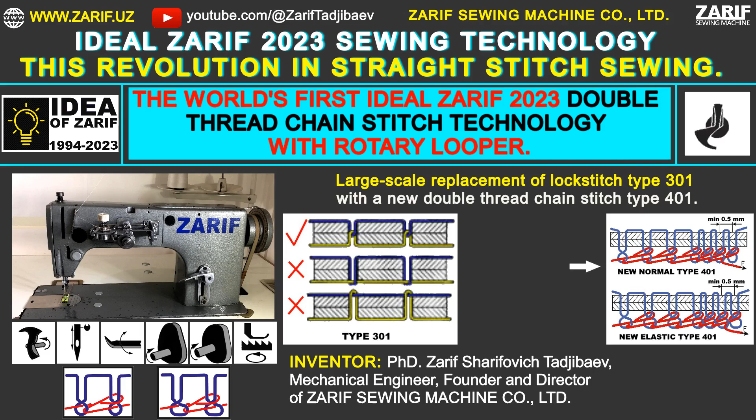1997. We modified an industrial lockstitch sewing machine, Class 1022, Orsha, Belarus, to carry out our initial trials. Through extensive testing, we identified areas for improvement and gradually improved the machine by applying our expertise. Finally, in 2023, we successfully created the world's first Ideal Zarif technology for straight stitch sewing.

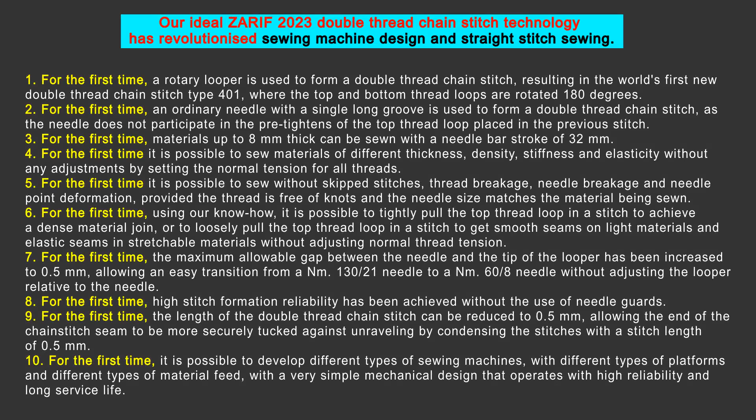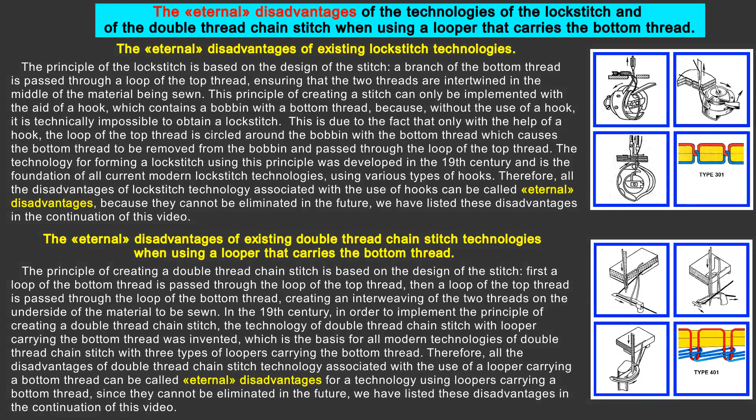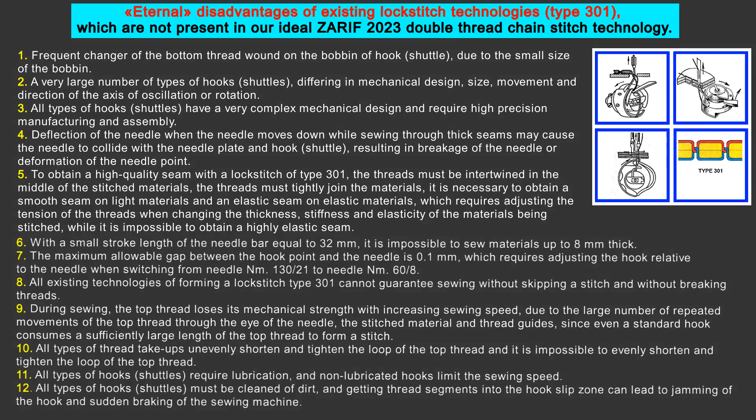Our Ideal Zarif 2023-year double thread chain stitch technology has revolutionized sewing machine design and straight stitch sewing. The eternal disadvantages of the existing technologies of the lockstitch and of the double thread chain stitch when using a looper that carries the bottom thread. Eternal disadvantages of existing lockstitch technologies, type 301, which are not present in our Ideal Zarif 2023-year double thread chain stitch technology. Eternal disadvantages of existing double thread chain stitch technologies, type 401, which are not present in our Ideal Zarif 2023-year double thread chain stitch technology.

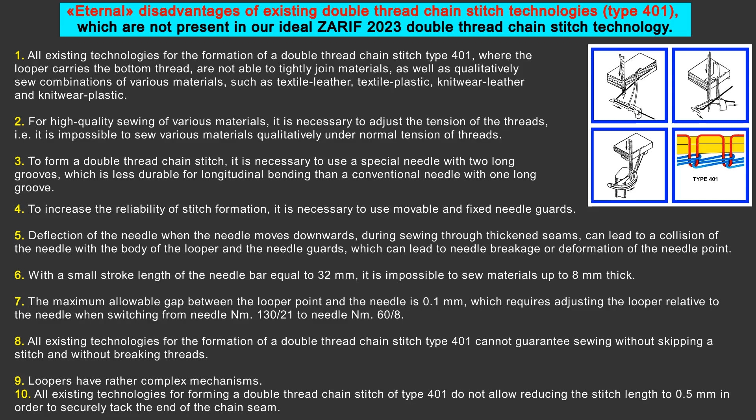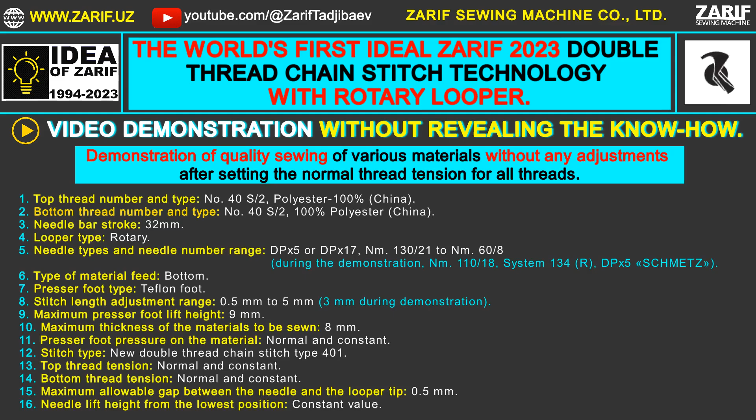Video demonstration without revealing the know-how. Demonstration of quality sewing of various materials without any adjustments after setting the normal thread tension for all threads. Our prototype of the innovative Zarif double thread chain stitch sewing machine works on the basis of our Ideal Zarif 2023-year double thread chain stitch technology with a rotary looper.

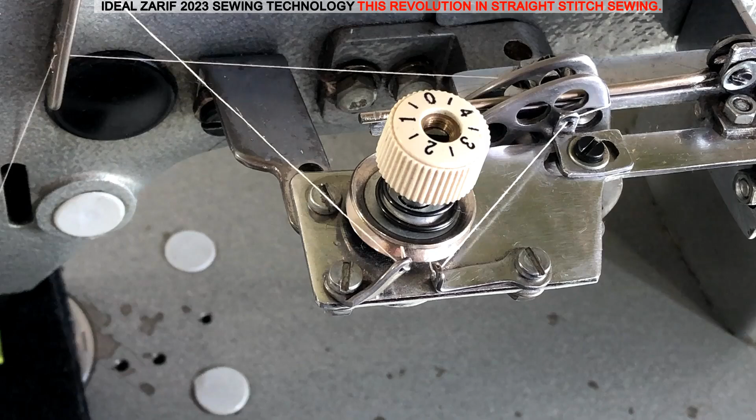For the sewing demonstration, we will be using sewing threads made in China. The main requirement is the absence of knots, as knots disrupt the stitch formation process as they cannot pass through the eye of the needle. During sewing, the top thread tensioner nut and the bottom thread tensioner nut, not shown, remain in a fixed position, ensuring the normal thread tension, neither too loose nor too tight.

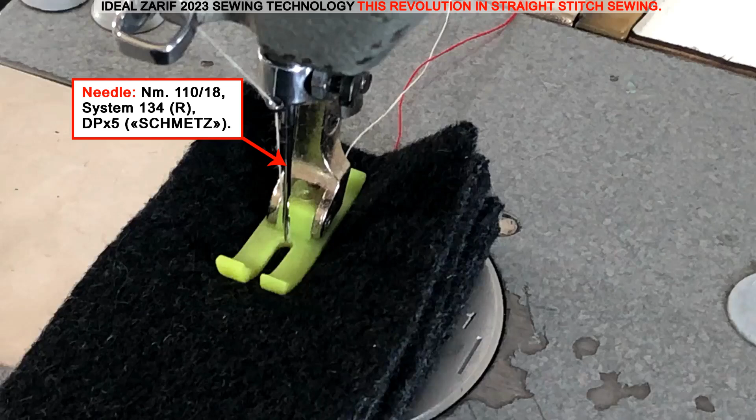In our Ideal Zarif 2023-year double thread chain stitch technology, the needle is not involved in pre-tightening the top thread loop from the previous stitch. As a result, for the first time ever, a double thread chain stitch sewing machine uses a needle with one long groove. This design offers greater resistance to bending compared to the double groove needle used in existing double thread and multi-thread chain stitch technologies.

Thanks to our Ideal Zarif 2023-year sewing technology, it has become possible for the first time in the world to reduce the length of the double thread chain stitch to 0.5 mm. This allows for a more secure tacking of the chain stitch seam end and prevents unraveling due to condensed stitches at a stitch length of 0.5 mm.

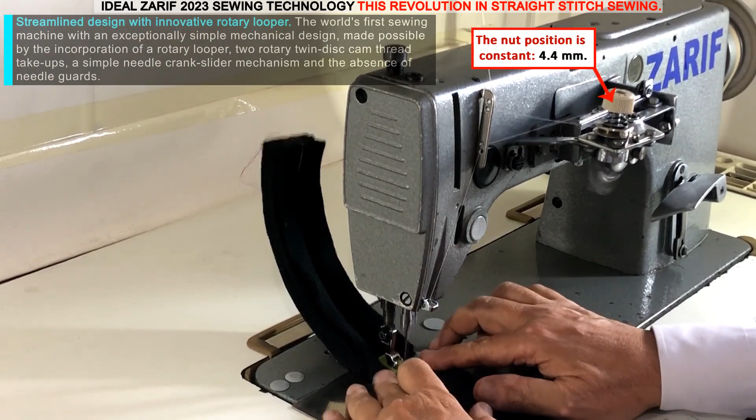Streamlined design with innovative rotary looper. The world's first sewing machine with an exceptionally simple mechanical design, made possible by the incorporation of a rotary looper, 2 rotary twin-disc cam thread take-ups, a simple needle crank slider mechanism and the absence of needle guards.

Revolutionary chain stitch look. This pioneering double-thread chain stitch sewing machine produces a new double-thread chain stitch type 401 in which the loops of the top and bottom threads are rotated 180 degrees. This innovative design makes the underside of the chain stitch look like a thick thread running along the seam, rather than a chain of threads, due to the use of a rotary looper.

1 long groove needle for maximum strength. For the first time, a double thread chain stitch sewing machine uses a needle with 1 long groove to produce a double thread chain stitch type 401, which offers greater flexural strength than a needle with 2 long grooves used in existing double thread and multi-thread chain stitch technologies.

Advanced capabilities for sewing thick materials. This groundbreaking sewing machine can sew materials up to 8 mm thick with a short needle bar stroke of 32 mm, thanks to our know-how. Adaptation to different materials. The world's first sewing machine that can efficiently sew a wide variety of materials with different thicknesses, densities, stiffness and elasticity without any adjustments, as long as all threads are set to normal tension, thanks to our know-how.

No needle adjustment for different materials. The first machine in the world that can sew different materials up to 8 mm thick without having to adjust the height of the needle lift from the lower position to form a loop with the top thread, thanks to our know-how. Easily sew combinations of different materials. The world's first double thread chain stitch sewing machine that can sew combinations of different materials such as textile-leather, textile-plastic and textile-plastic zippers without changing the normal tension of the threads, thanks to our know-how.

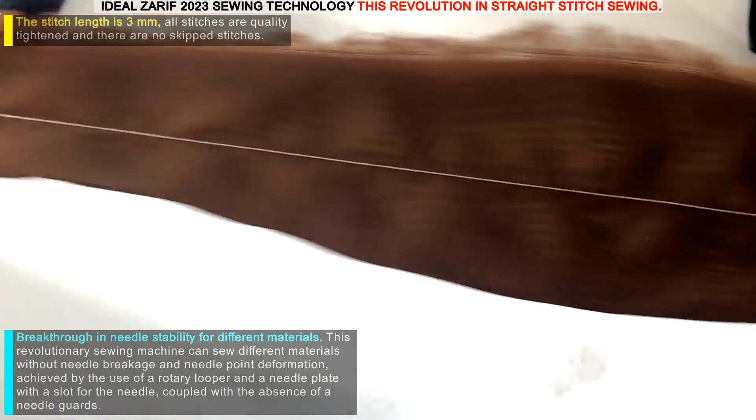Breakthrough in needle stability for different materials. This revolutionary sewing machine can sew different materials without needle breakage and needle point deformation, achieved by the use of a rotary looper and a needle plate with a slot for the needle, coupled with the absence of needle guards.

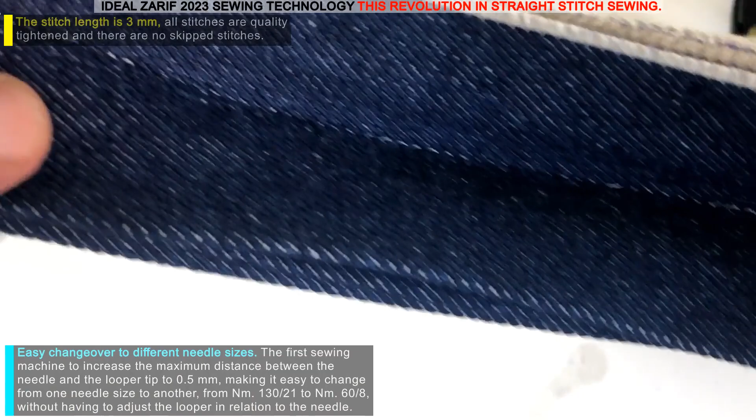Easy changeover to different needle sizes. The first sewing machine to increase the maximum distance between the needle and the looper tip to 0.5 mm, making it easy to change from one needle size to another, from number 130 to number 60, without having to adjust the looper in relation to the needle.

Elimination of skipped stitches and unraveling. This pioneering sewing machine, thanks to our innovative design, can sew materials without a single skipped stitch, which is critical for chain stitch seams, as all types of chain stitch seams are prone to unraveling, both at the end of the seam if not securely tacked, and from the skipped stitch back to the beginning of the seam. No thread breaks.

The first sewing machine capable of sewing through materials without thread breaks when low-strength threads and threads with knots are not used, thanks to the smooth tightening of the top and bottom threads with 2 rotary twin-disc cam thread take-ups and our know-how. Quality joining of different materials without adjustments. For the first time, our advanced technology allows to quality join materials of different thicknesses, densities, and stiffnesses with chain stitch without any adjustments during the sewing process, simply by setting the normal thread tension for all threads, thanks to our know-how.

Efficient sewing of mixed material combinations. Our advanced technology enables high-quality stitching of material combinations such as textile leather, textile plastic, and textile plastic zippers without the need to adjust the normal tension of the threads, thanks to the use of our know-how.

Secure tacking of the chain stitch seam end. The world's first double thread chain stitch sewing machine, thanks to our know-how, makes it possible to reduce the length of the chain stitch to 0.5 mm, thus making the end of the chain stitch seam more secure against unraveling by condensing the stitches with a stitch length of 0.5 mm.

For the first time, materials can be joined tightly with chain stitch. The world's first double thread chain stitch sewing machine, thanks to the application of our know-how, is able to lock the top thread loop tightly in the stitch without changing the normal thread tension, resulting in a normal stitch that ensures a tight joining of materials for the first time in the world.

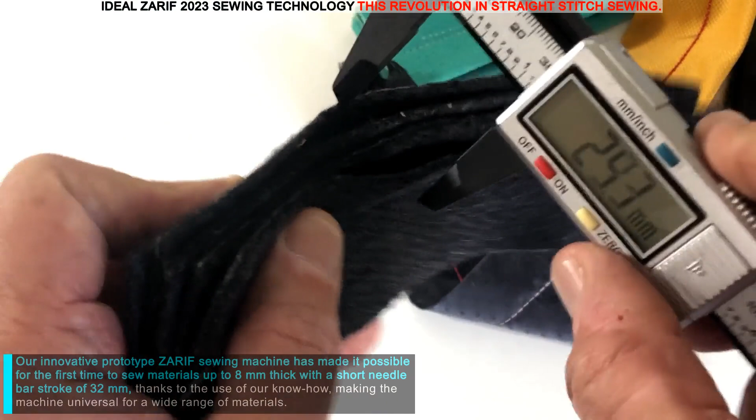Our innovative prototype Zarif sewing machine has made it possible for the first time to sew materials up to 8 mm thick with a short needle bar stroke of 32 mm, thanks to the use of our know-how, making the machine universal for a wide range of materials.

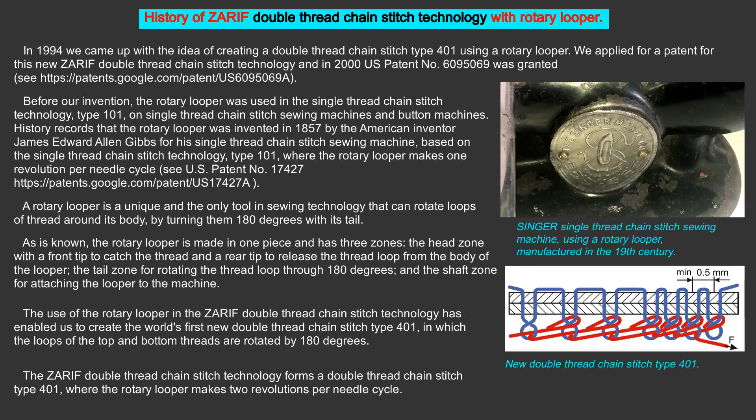History of Zarif double thread chain stitch technology with rotary looper. In 1994 we came up with the idea of creating a double thread chain stitch type 401 using a rotary looper. We applied for a patent for this new Zarif double thread chain stitch technology, and in 2000 US patent number 6095069 was granted. Before our invention, the rotary looper was used in the single thread chain stitch technology, type 101, on single thread chain stitch sewing machines and button machines.

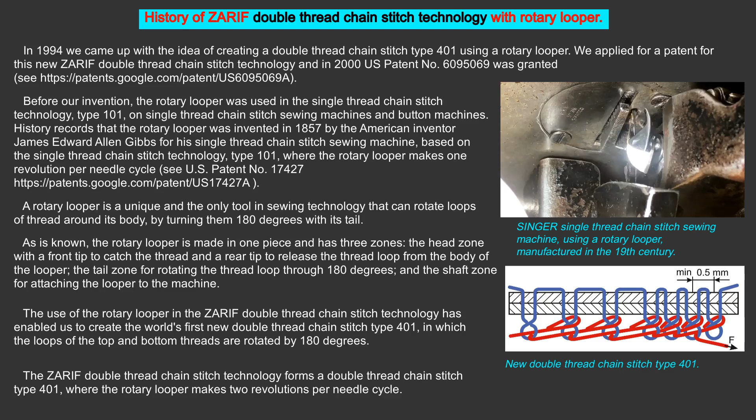History records that the rotary looper was invented in 1857 by the American inventor James Edward Allen Gibbs for his single thread chain stitch sewing machine, based on the single thread chain stitch technology, type 101, where the rotary looper makes 1 revolution per needle cycle. See US patent number 17427. A rotary looper is a unique and the only tool in sewing technology that can rotate loops of thread around its body by turning them 180 degrees with its tail.

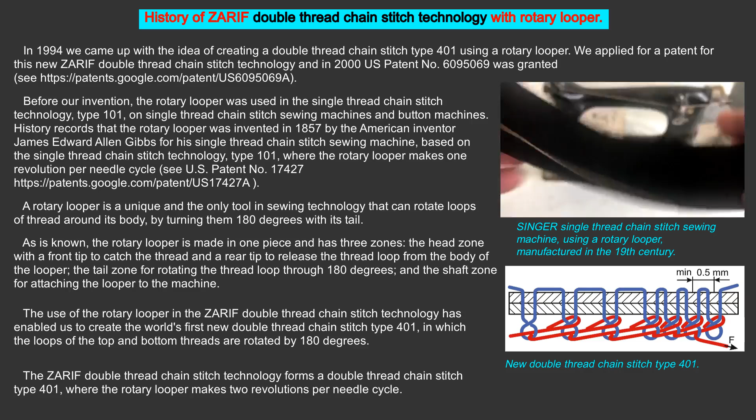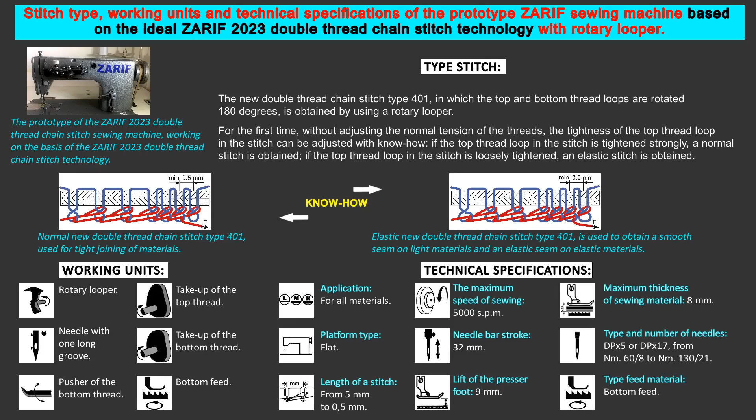Stitch type, working units, and technical specifications of the prototype Zarif sewing machine based on the ideal Zarif 2023 year double thread chain stitch technology with rotary looper. The world's first prototype of the Zarif 2023 year double thread chain stitch sewing machine has an extremely simple mechanical design and forms stitches with high reliability and durability.

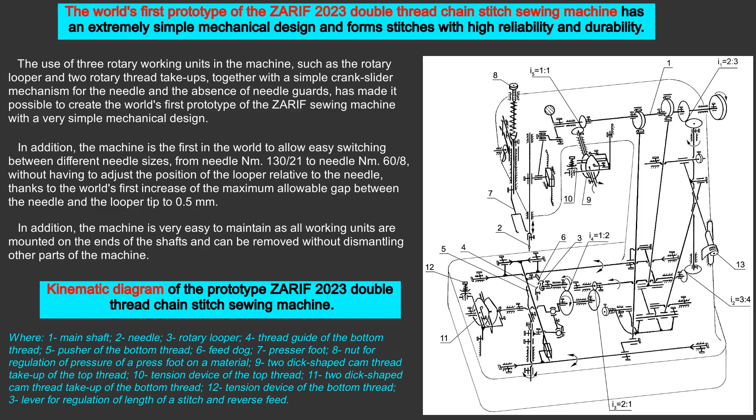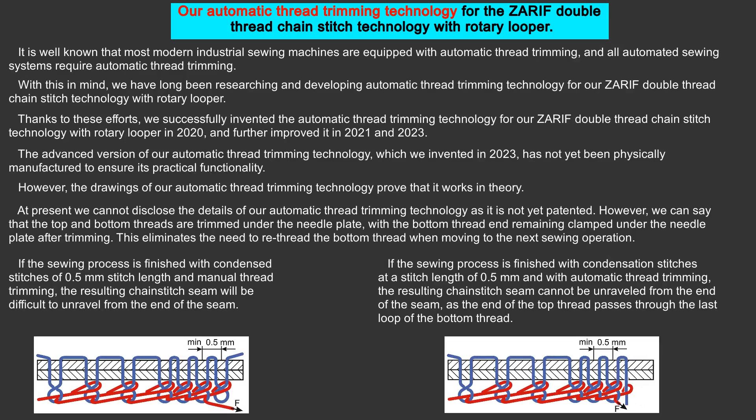Kinematic diagram of the prototype Zarif 2023 year double thread chain stitch sewing machine. Our automatic thread trimming technology for the Zarif double thread chain stitch technology with rotary looper. Our ideal Zarif 2023 year double thread chain stitch technology with rotary looper opens a new era in the development of automated straight stitch sewing.

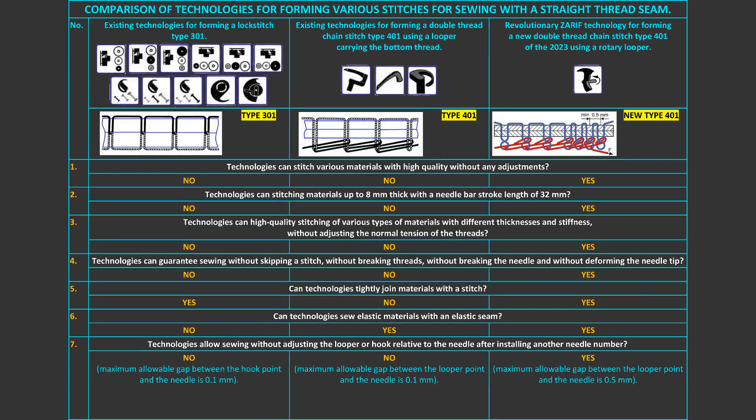Application of the revolutionary ideal Zarif 2023 year double thread chain stitch technology with a rotary looper that forms stitches in only one direction. Application of the revolutionary ideal Zarif 2023 year double thread chain stitch technology with a rotary looper, forming stitches in any direction.

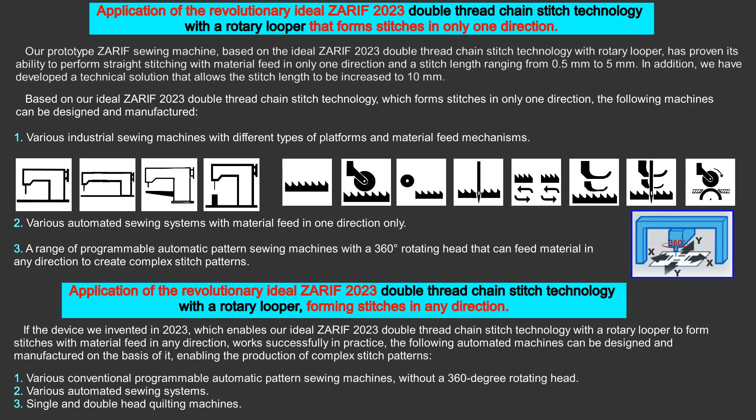Can our revolutionary ideal Zarif 2023 year double thread chain stitch technology with a rotary looper become obsolete in the future? Therefore, threading is likely to remain the main method of joining different materials in the future, as it is today. Our ideal Zarif 2023 year sewing technology aims to make thread-based joining more attractive and universal.